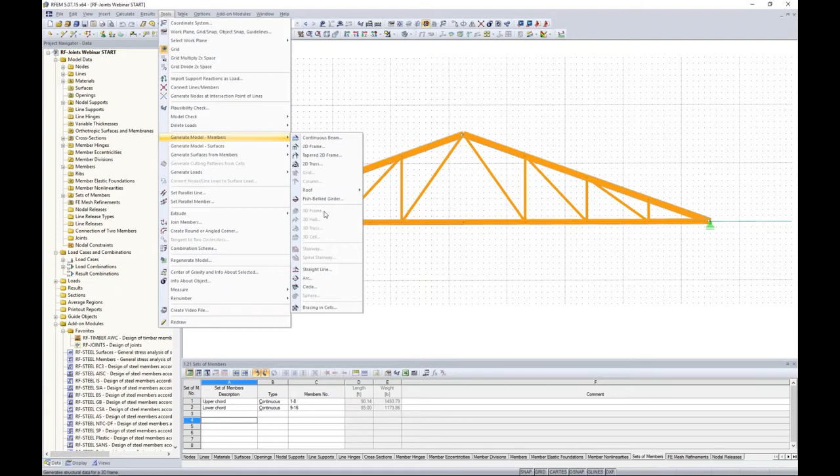So for the sake of time, I did go ahead and create this general truss here, and I am in a 2D environment. So in order to create this truss, I used our structure generator. If we go up to Tools, Generate Model, under Members, you'll notice that we have several options here. A few of them are grayed out, and that's simply because I'm in a 2D environment. But for this example today, I used the 2D truss option. This dialog pops up. You can see all of the different truss types that we have. We have the option to set our diagonals, different directions, and the rest is pretty self-explanatory.

We simply give it the number of bays, the total length. It's a pretty large truss for today, so we set this at 85 feet and the total height at 15 feet. Then the program asks us to set the cross sections. So for the upper chord and lower chord, I just gave it general glulam timber members, as well as those specific properties for a glulam. I can press my little info button here to see the cross-sectional properties, a 6x12 for my upper chord, and for my lower chord, I modeled a 6x10.

For the diagonals and verticals, these are just more of post members, 5 inch by 5 inch, Douglas fir larch, so a softwood here. Again, the member properties can be viewed. Now, the program automatically sets the member type to beam for the upper and lower chords, and you'll notice that the diagonals are set to truss.

For any type of modeling software finite element, we typically have different member types. For our program, beam type is anything that would be a beam or column. Now a truss would be the same thing as a beam, but we've automatically applied the moment end releases to those members. So a truss makes perfect sense for all of our internal members within this truss that we don't want to transfer any moment to our upper and lower chords.

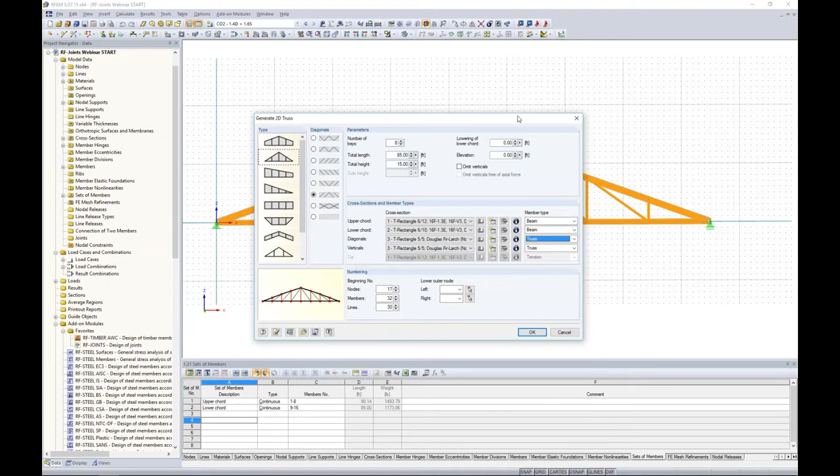So leaving these settings as is for the member type, we press OK, then we'll get the generation of our timber structure here. Then I did add a pin support on my left-hand side and a simple roller support on my right-hand side. Now, the other thing that we need to take care of is that when I did generate the truss, a fully rigid connection was available at the top of the truss, also on the left and the right.

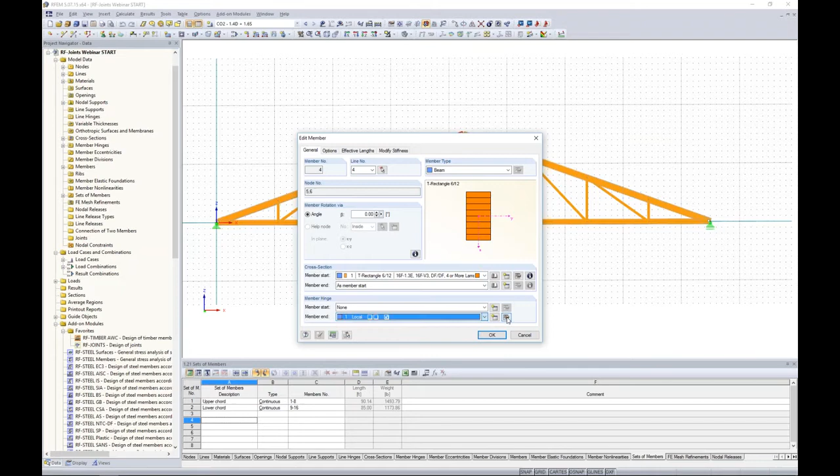So you'll notice that I've applied a simple pinned member end release for the top of my truss, just one of the members. You can do so by editing the member, double-clicking it. You'll notice that we have member hinge at the start and member hinge at the end. I just created a moment release, which you can see here in the two-dimensional direction about the local y-axis. Now I did so at the beginning of the member on my left-hand side and the end of my member on my right-hand side. So modeling is essentially complete for this simple timber truss.

I did also apply some loads, and I have two load cases. You'll notice in my drop-down box I have dead load and snow load. So my dead load, if I display it, is just a simple member load, 0.08 kips per foot. The snow load, on the other hand, is 0.12 kips per foot in the projected Z direction. So we're taking into account this member angle and how that load directly applies to these upper chords.

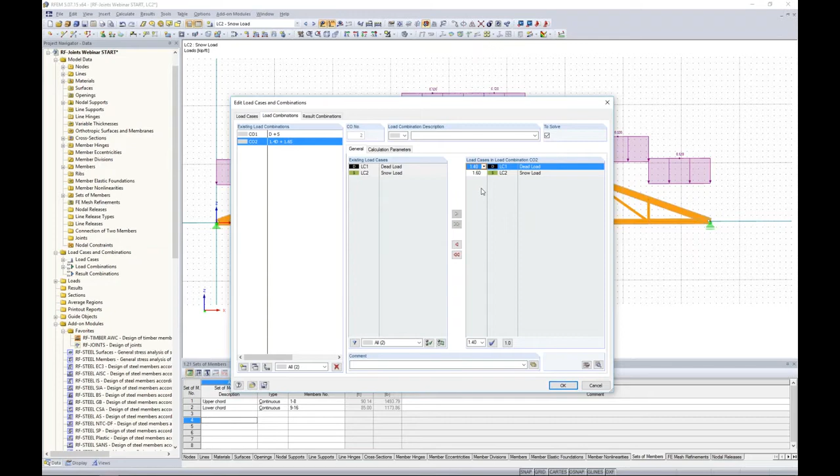Now I also created a couple of load combinations just manually, and if we enter the load combinations dialog box we can see this. So we do have the options to automatically create these load combinations like I mentioned per ASCE 7 for example. But for the simplicity of today's example, I created two load combinations. The first could be considered an ASD load combination where my load factors are 1.0 for dead load and snow load. My second load combination is maybe an LRFD load combination where I have applied the load factors of 1.4 and 1.6. You can see in this drop-down box we have quick access to them, or we can overwrite them with whatever load factor we would like.

So now you have the ability to toggle between the load cases and load combinations, and we can run our first analysis. I can go to calculate all, and we'll see within a split second the model will be solved. So we are still in RFEM. We haven't touched any of the add-on modules yet. So once we run this analysis, in our project navigator over here, we have the results tab available. And we can, for example, view everything graphically such as global deformations. We can change the display factors here.

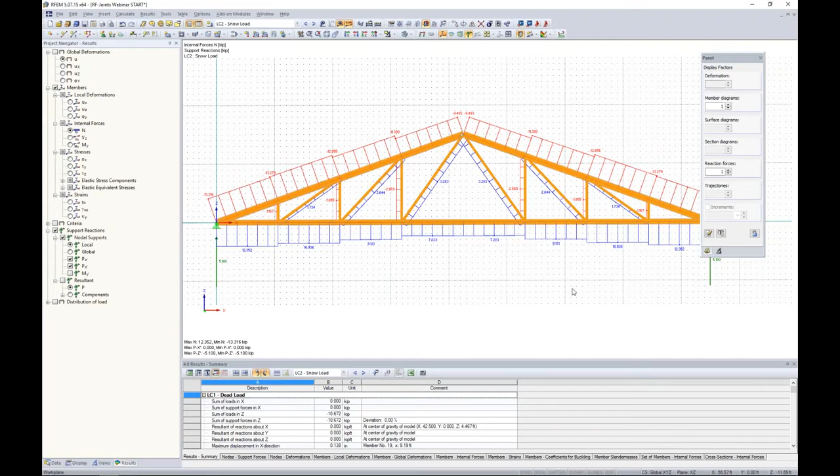What may be a little bit more interesting is to take a look at our member internal forces. Here you can see we have our axial forces. We have some pretty high tension forces on the bottom. We have high compression forces at the top, denoted by the negative magnitude sign here. Taking a look at shear forces, I can always increase my member diagrams here. And lastly, we have our moments. We should have no moment transfer where I put in those moment hinges as well as along our diagonals and verticals here. Same thing for support reactions.

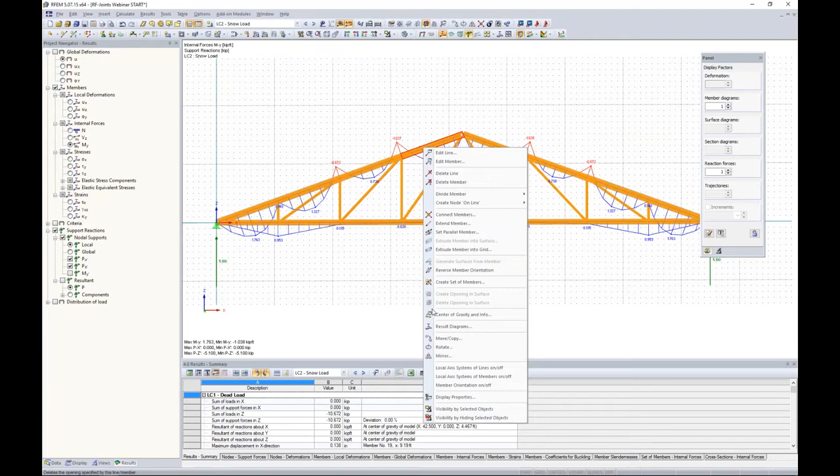These are controlled here graphically within our results in the project navigator dialog box. And you have full control over colors, sizes of fonts just by going to Options, Display Properties. Now, this is great graphically, but sometimes we want to see a little bit more information as it relates to the member. So we can always right-click on a specific member and choose Results Diagram.

Now you'll see the entire member here. We can turn on more graphs such as internal forces, deflections, and get a more realistic view of what's going on along the length of the member. You can print this off directly to our printout report. You can export directly to Excel for further sorting. So a lot of powerful capabilities in just viewing our analysis only.

So now that we have run a full analysis, that's great, but typically as design engineers, we want to move on to code checks. So this is where we are going to make the clear distinction that we're going to utilize an add-on module. In the data navigator over here, you will see the long list of add-on modules. We do work in the add-on module system because we really want to cater the software to your needs. Not everybody is going to be in the Chinese steel design, for example, so why should you pay for it? So we, again, are trying to cater towards your specific design needs.

We also have them organized a little bit better with this add-on modules drop down at the top here according to the different materials and applications, dynamic analysis, things like that. So for today, we will launch the RF-TIMBER AWC. Now, to begin with, you'll notice we have both ASD and LRFD, so that's nice. Some other software programs for timber design only give you ASD, for example, so you have complete control over which design method you would like to run. Today, we will choose the LRFD.

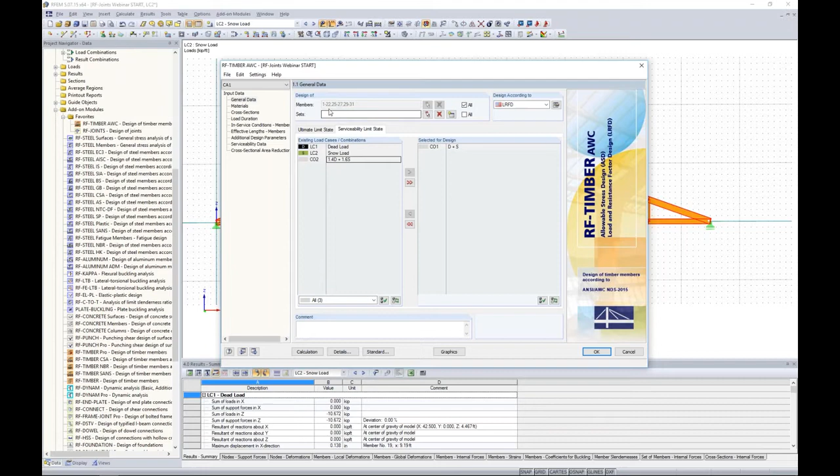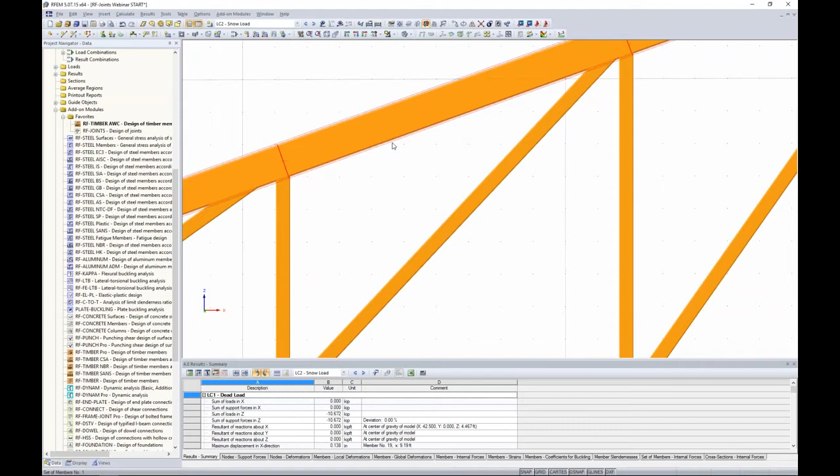Now, the next thing to go ahead and define are which members or sets of members would we like to design. So let me quickly explain that when we go back to this add-on module, if I zoom in here, the program automatically created a set of members with the truss generation for my bottom chord, and I also have a set of members for my upper chord. What I wanted to mention is if you do zoom in, you can see a faint dotted line around it. I know that's hard for you guys to see, but if you were in the software, you'd be able to hover over that and see it's a set of members.

A set of members will essentially be designed like a continuous beam. You know, we don't want to optimize one of these individual members different from its adjacent members. We want to get a code check for this entire bottom chord. So that's where the sets of members comes into play. Now the default is to select all members.

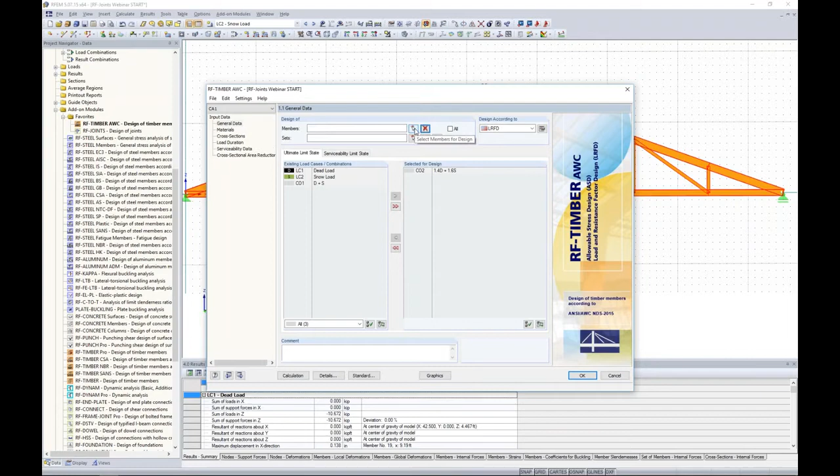I'm going to clear this, and for my member design, I'll scroll in here and I can just use my selection box, similar to what you would find in AutoCAD, for example, to select all of my internal diagonals and verticals for my member design. And for my sets of members, I simply choose graphically the upper chord and the lower chord, and we click OK. So now we have the distinction between members and sets of members for what we'll be doing for design purposes. Now all I need to do is to simply move down the list.

Next we will go to materials. Again, everything is brought in from RFEM, so I don't have to redefine my materials, my geometry, my cross sections. All that we're doing in this add-on module is giving some further design information related directly to the NDS code.

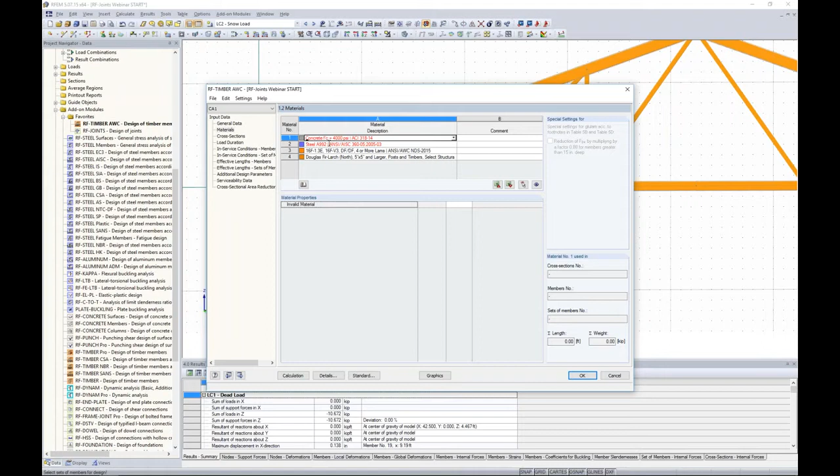Now you'll notice that we have two bright red materials here, and that's just because when I open up a new model, concrete and steel are defaults within the program. I can delete these back in RFEM if I wanted to, but all the program is telling me is that these are not applicable in the timber add-on module. That makes sense. But our two materials that we did define to our members back in RFEM are applicable. I can click them and view all of the material properties that will go into the design of this member.

Again, cross-sections, same concept. The member cross-sections are brought in from RFEM. I can view some of the cross-sectional properties here again if I'm interested in them. And we can move on to load duration.

Now, this is load duration factors. We assign dead load and snow load to the applicable loads that I applied in RFEM. The program is smart enough to know what load duration factors to apply to this. Now, we can always use our drop-down box to adjust these, but even more so, there is the standards button down at the bottom of the dialog box.

So the standards button will show you every single factor that is going into the design process within this add-on module. So for example, the load duration factors. What is nice is that you can adjust these if for some reason you don't fall between 10 years and 2 months, but somewhere in between, you can adjust them. That's completely up to you.

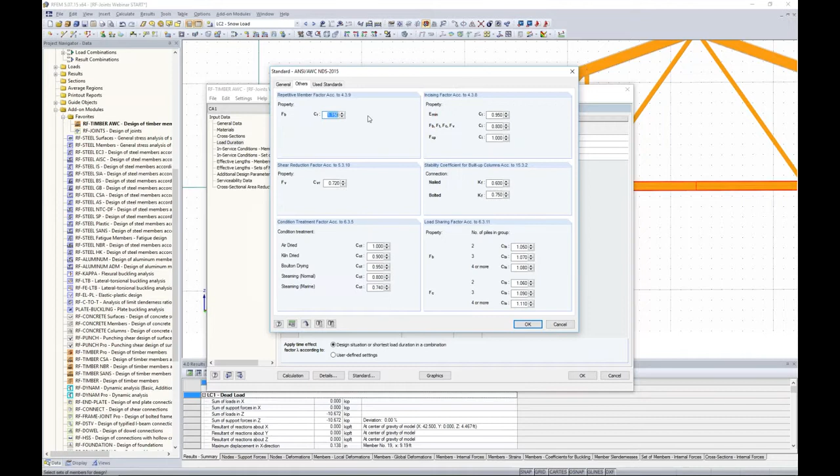Then you'll notice some of the other factors such as temperature factor, wet service factor. If we go to the others tab, repetitive member, shear reduction factors. Again, this is just all the information from the code. Under the used standards, we just list for you to know which standards are being utilized for the design, which you'll see at the end, we give you references to these standards as well.

So moving on down the list to in-service conditions. Again, this just comes from our standards button down here, moisture service conditions. Are the members dry or are they wet? Our temperature ranges, we can change these if we would like. Now you'll notice that we have 2 separate tables for members versus sets of members. This is just so we don't group everything together. I think it's laid out a little bit nicer when we separate members versus sets of members, and then we can control those factors individually.

Effective lengths for members. So this is stability checks. You'll notice that we have buckling about the weak axis, buckling about the strong axis, and lateral torsional buckling. So I'm going to assume for all of my internal diagonals and verticals here that buckling about the strong and weak axis as well as lateral torsional buckling is a concern. So I'm just going to leave everything as is here, and I'm going to let the program determine if this is okay based on my design.

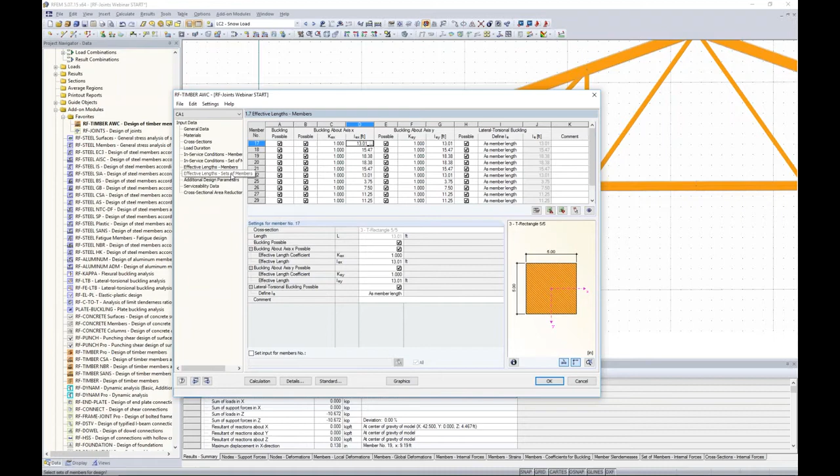Now the effective lengths here default to the full member length, but you can easily control these lengths by typing it in or graphically using the measuring tool here, so you have complete control over this. Now again, our sets of members is on a separate table. And for my upper and lower chord, I'm going to assume that I have complete lateral bracing along the length of the member. So therefore, weak axis buckling about the local x-axis, which I have my axes shown down here, is not a concern to me.

And it would be the same thing for my lateral torsional buckling. So this is not a concern based on my connections or my lateral bracing. All I have to do is just simply uncheck the possible. Buckling about the y-axis or the strong axis, I am still concerned with this, but right now it is set to the full member length, the full set of member length. So it's pretty large, 90 feet and 85 feet.

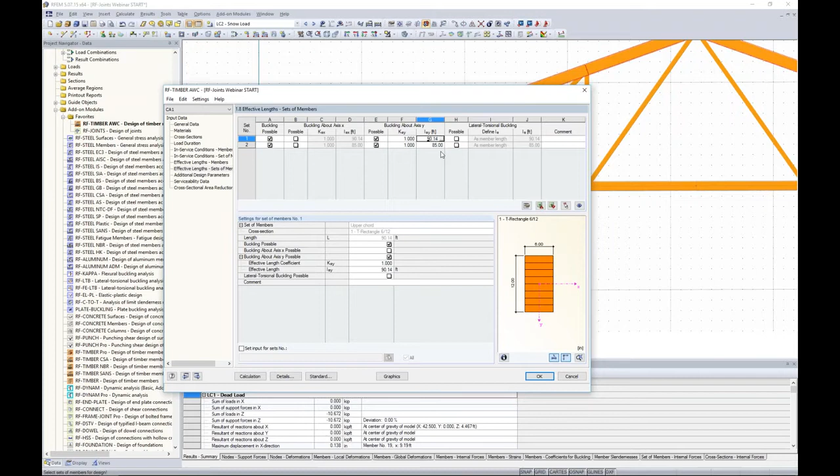Maybe for uplift wind purposes, I have much smaller unbraced lengths here. For example, the upper might be 3 feet and then the lower might be 3.5 feet. So as a design engineer, you always want to pay careful attention to your unbraced lengths because this significantly affects our stability design.

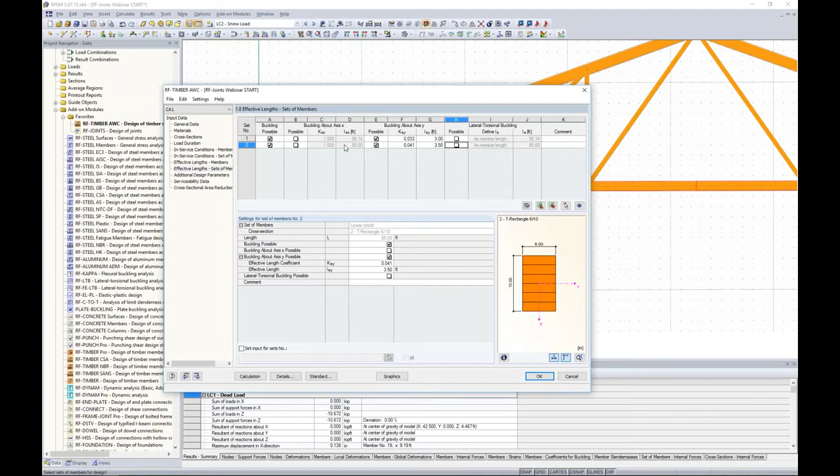Okay, so moving on to additional design parameters here. This is just shear reduction factors, edge bonded. This refers to our glulam members for our upper and lower chord members. We have the code references here. Again, the standards button will tell you what those factors are. If we scroll down a little bit further, here's our incising factors and repetitive factors for our post or our brace members within the truss.

And we can move on down to the serviceability data. Here is just deflection checks. We can check every single member if we'd like to in our model, or maybe we're only concerned with checking a couple of members. So for this example, I will graphically choose perhaps one of my diagonals here that I want to check my deflections.

I click OK. The manual reference length is set to the full length of the member. That's fine. Do I have a pre-camber? If so, I could put this in here. And lastly, I need to specify if this is a beam or cantilever. Now I can do the same thing with a set of members.

So maybe I'm interested in my bottom chord deflection. Well, all I need to do is to graphically select my bottom chord here. The full reference length is set at 85 feet. And again, we just use the beam type beam. Now the question is, what deflection ratios am I comparing this to? Where can I control that?

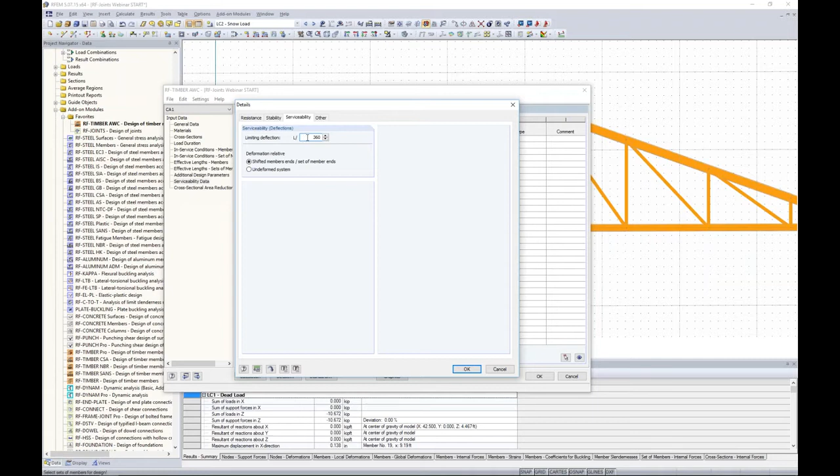Well, under the Details tab under Serviceability, here's my limiting deflection ratio. You can see the default is set at L/360. Now for cantilevers, it will always use 1/2 of this ratio that you set in here.

Then you need to specify whether the deformation is relative to the shifted member ends or the undeformed system. This may be better known as relative versus absolute deformation. So this is where we can control this limiting deflection ratio and change that if we'd like to.

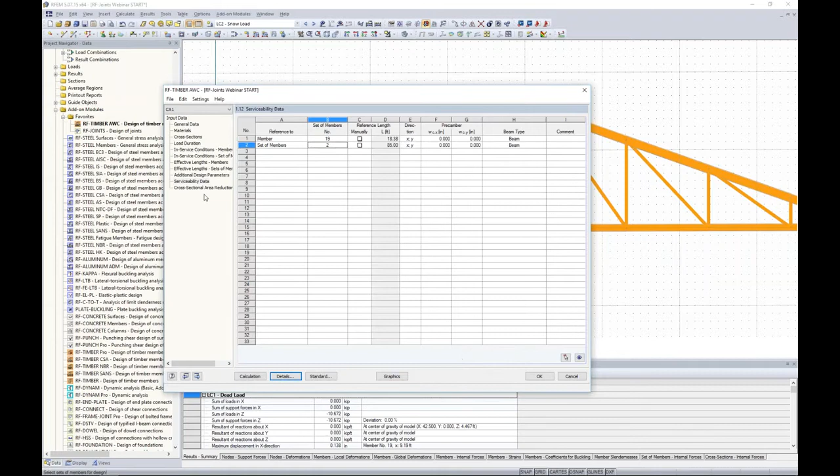And lastly, we can move on to the cross-sectional area reduction. This is if we have a notch within our member. Maybe the member connection at the ends, or maybe the member is sitting on top of a wall or another member, and we have to take this cross-sectional notch out of the member. We can easily account for this by just selecting the member graphically again, and then giving where the notch location is, whether that's the start, the end, or within the inner span here. Then we just give the notch the geometry, and the program will automatically account for that cross-sectional area reduction.

So it's smart enough to only compare those internal forces at this notch location for design purposes, meaning we don't have to reduce the entire cross-section of our member and get an over-conservative design. So just a nice little additional feature if you do have this scenario. For our case, we won't do that today.

Now, before running the calculation, I want to quickly run through the rest of the details tabs. What is exactly going on behind the scenes here with some of these other options? So the first one under resistance is consideration of connections, the reduction of limit tension stresses. So if I check this, what this means is that occasionally we have the weakening of a cross-section at a connection. So what I can do is check this checkbox, and all I need to do is to select a node, and here I give the connection length.

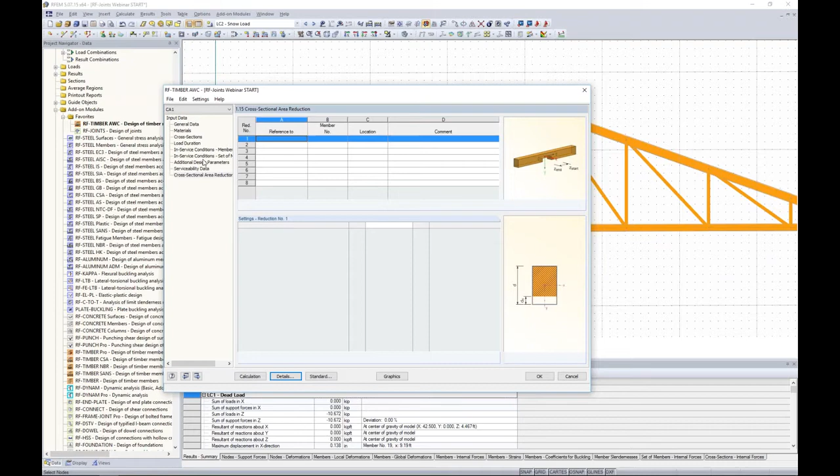Under the Stability tab, we have Perform Stability Analysis automatically checked. If I were to turn this off, click OK, you'll notice the effective lengths where I put in for strong and weak axis buckling, those are gone now. So I'm telling the program I have no concern with buckling or lateral torsional buckling, so completely ignore this for my design. Now, again, the default is to have this turned on. We've already been through this with our particular tables.

What we're doing is a stability analysis according to the equivalent member method. With the equivalent member method, the NDS says to take into account secondary effects within the design phase for our structure. This is very different than something like steel, for example. Steel tells us to take into account secondary effects in the analysis section.

Things like P-delta, stiffness reductions, notional loads are all taken into account in RFEM, the analysis side. But again, timber is a little bit different in that we have these factors added to our bending capacities, for example.

So with that said, back in RFEM, if I open up my load combinations, you'll notice that under calculation parameters, it is always default in the program to run a second order analysis for our load combinations. This will take into account P big delta and P little delta.

So perhaps you have an existing structure, or you're just really close on your design checks and you don't want to increase your member sizes. Technically, you can go back into RFEM, change this to a geometrically linear analysis, and then you can take into account these second order effects within the add-on module only, so the design part of it.

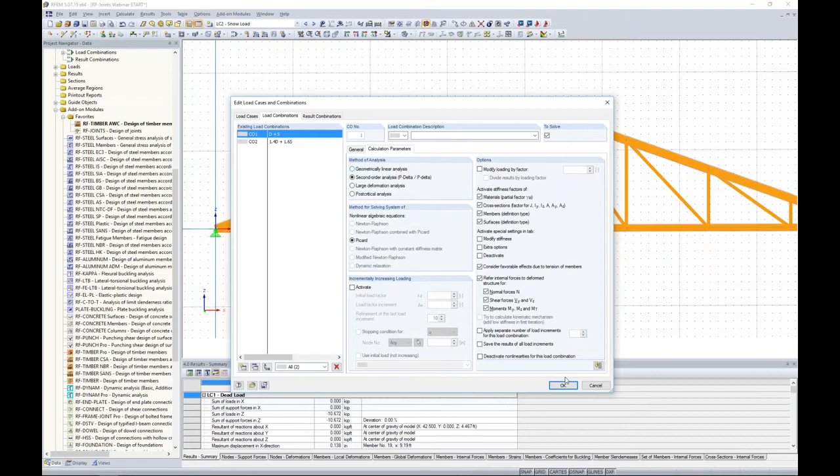Now, it is typical for most engineers just to leave on P-delta analysis in RFEM. Therefore, your internal forces are a little bit higher, but it's just a more conservative route to take.

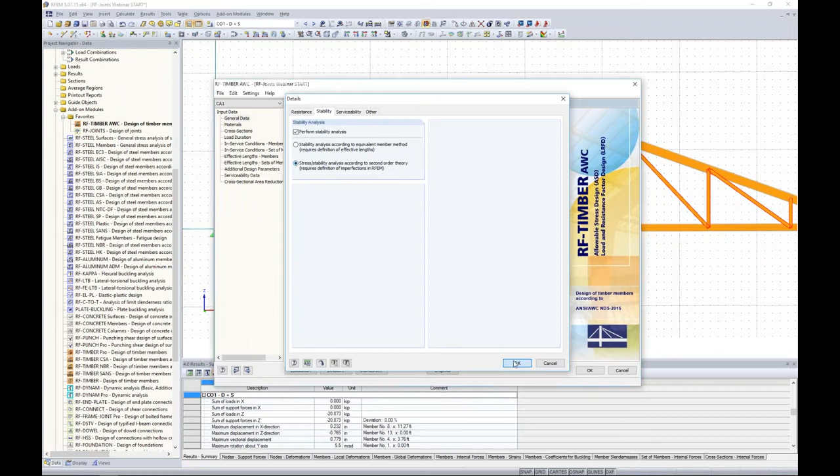Now, the other option within here is stress stability analysis according to second order theory. It requires definition of imperfections in RFEM. If I were to check this, what I'm doing is I'm telling the program under the effective lengths that the buckling for strong and weak axis, I'll take that into account with the analysis.

Maybe that's with stiffness reductions or with those notional loads, imperfections, things like that. With lateral torsional buckling, there is no way to take that into account with the analysis side, so I'd like to still do a check with that within the design side. Regardless, today we will stick with the default of checking our strong and weak axis buckling.

Serviceability we've already been through, and on the other tab, cross-section optimization. So design ratios are maybe more around 0.8, possibly 0.9 - it's typically not 1.0. So for optimization for your members, which I'll show you in just a second, you can change this to 0.8, for example, for design purposes.

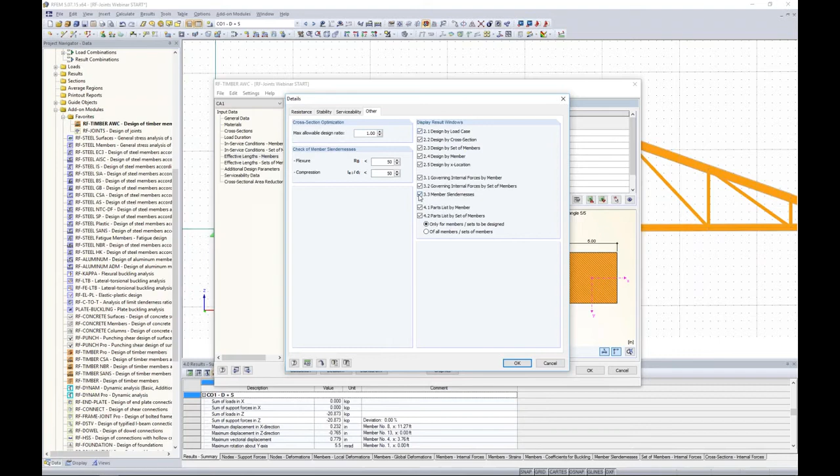Check of member slenderness. If member slenderness is a concern, here are the ratios that we have set according to the code for flexure members, compression members. You will need to activate 3.3 member slenderness right here for our result windows if you are wanting to check for member slenderness. So that's pretty much the concept for all of the input data.

Now we're ready to run our first calculation. You can see that it solves within a quick second. All it's doing is bringing the internal forces into this add-on module from RFEM, and we apply the NDS code for our design. Now we have our results tables available, and we can view the design by load case.

We can view design by cross-section. We have 3 different cross-sections here. Maybe we want to view design by the sets of members or by each individual member.

Now, what's also great is that as I'm clicking through these tables, you'll notice that it is synced to the graphics view in RFEM. Even the X location of my controlling internal forces line up with my tables here.

And something else that I really pride ourselves on, because I know this isn't available in a lot of other software, is that we give you the code check for everything within the NDS. So we're not just giving you the controlling code check for each member, but you can actually scroll through and view the different checks individually.

Even more so, we give you all of the variables that go into that code check, as well as the equation references. So if you have the NDS code right in front of you, here's the equation for your C sub P factor. You can quickly flip to it and understand where those numbers are coming from. So again, a very powerful feature.

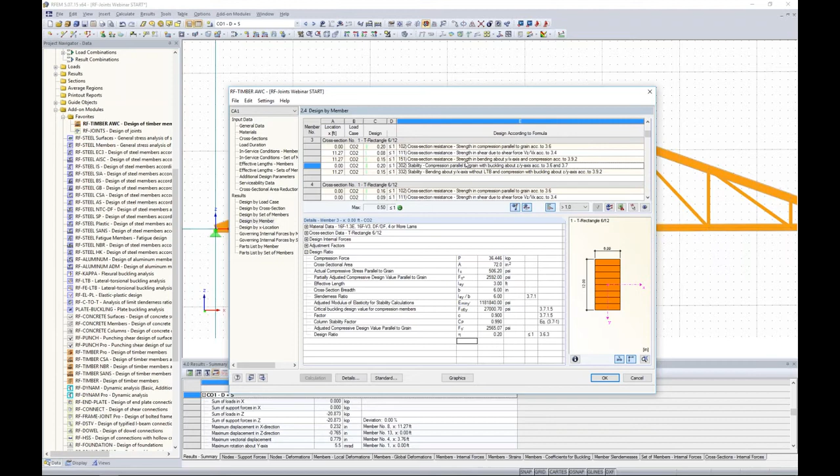Now you can always export directly to Excel to do some further sorting, and as you can see, we have this nice big green smiley face because our design check is only at 0.5. So looks like we're doing quite well with our design. We can also view some of the governing internal forces by member if you are interested in that.

And lastly, we have a parts list by member, or a material takeoff.

As far as optimization, let's go back to our cross sections table, where you'll notice the max design ratio for each cross-section is given. You can see our top chord is pretty low, at 0.22, so maybe this isn't an ideal cross-section to have, and we'd rather optimize to something more like 0.8.

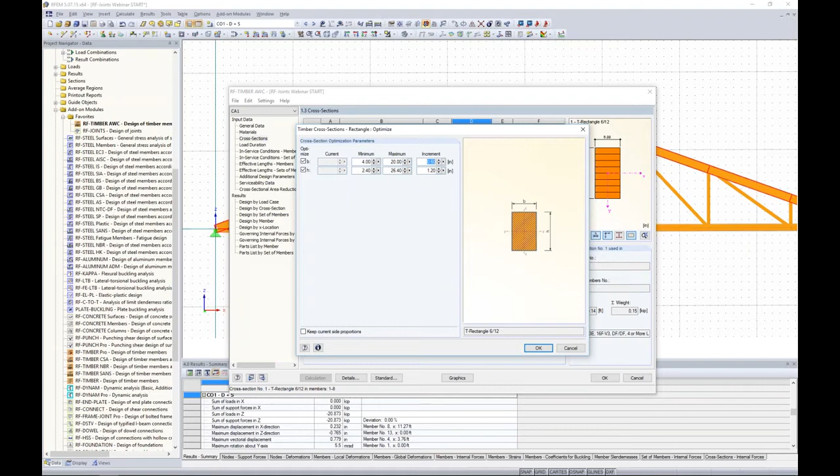We control that 0.8 under our details setting, where we can choose the option to optimize. When I click yes, all I need to do is give the program some dimension ranges for both my width and height, like maybe 4 inches to 20 inches with an increment of 0.5 inches. Then we rerun the calculation, the program will optimize, and we can continue on using these new section sizes.

For connection purposes, I'm not going to do this, so we'll just stick with the design we're given.

Lastly, we can view everything graphically. We're back in RFEM, but still technically in the add-on module, as you can see from the drop-down box and this dialog box here - we're still in RF-TIMBER AWC. I can view my ultimate limit state designs graphically here, and turn on my panel, well below 1.0, and we can print these off.

Serviceability we can take a look at as well. Remember, we only check serviceability deflections for our set of members down at the bottom, and one single member here. So graphically, we can view everything rather than just the tables.

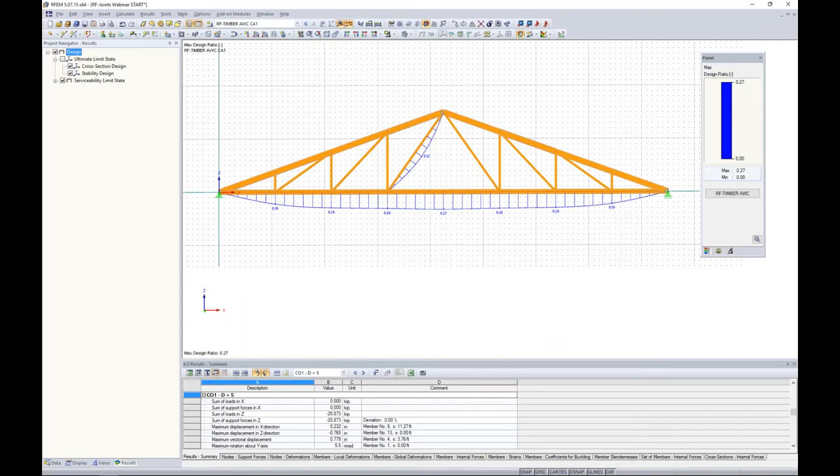So that basically sums up the member design. The next thing we want to move on to is connection design.

I can go back to my data tab, and I have my other add-on module here, RF joints, and I will launch that. Again, just another simple dialog box, which is the add-on module, taking in all the internal forces. We just need to further specify some information.

You'll notice we have steel and timber. Unfortunately, at the moment, steel is only per Eurocode design, but at some point in the future we do plan to add AISC as well as CSA steel connections. But what's exciting is that we did add the NDS 2015 for our timber connections.

You can see we have both ASD and LRFD available. Maybe to just continue on from our member design, we'll stick with LRFD design. We have steel to timber connections.

Now the joint categories - we either have general dowels we can choose from, or you can also see we have bolts. For today, we'll be going with general dowels.

Now, 3 different joint types. We have the first joint type, which is main member only. Maybe you have the cantilever of a beam from a wall, for example - that would be applicable for this type of connection.

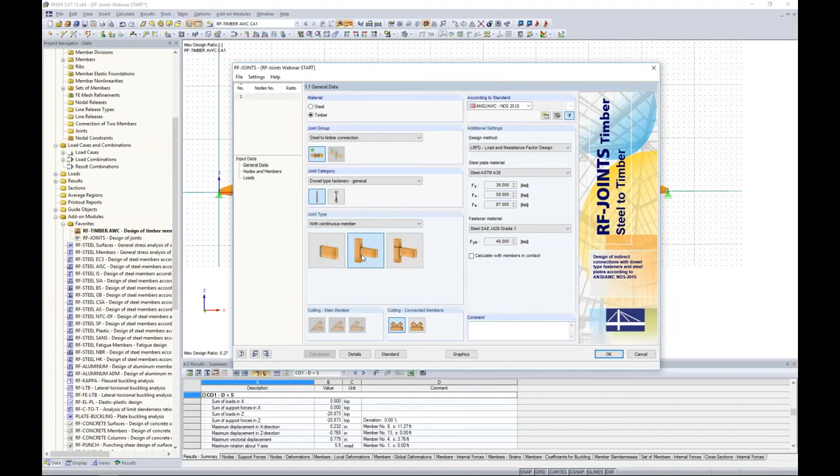The second connection type would be with a continuous member and a second member framing in. That might be something more like this connection here, where we have our continuous upper chord and a vertical framing into that continuous member.

And lastly, we have without continuous member. So at this particular connection joint, we don't have any continuous members that we're wanting to define. This is what we'll be continuing on with today.

As far as the cutting of the main member and connected members, I'm going to pause on this and we'll get back to it, because it'll make more sense once we're visually looking at our connection.

Steel plate material - from this drop-down box you can see we have several ASTM materials to choose from, but if by chance you don't see what you'd like, you can always enter your own user-defined steel materials with yield strength, ultimate, and dowel bearing strengths here. For today, we'll stick with the A36 material.

The fastener material, again, some ASTM standards or user-defined. We will stick with J429 with a yield of 48 KSI.

The checkbox 'calculate with members in contact' - if we turn this on, it essentially tells us that we're considering two members are in contact. If we have extremely high pressures from one member onto the other, the program will flag us and tell us this is something you may want to look into further.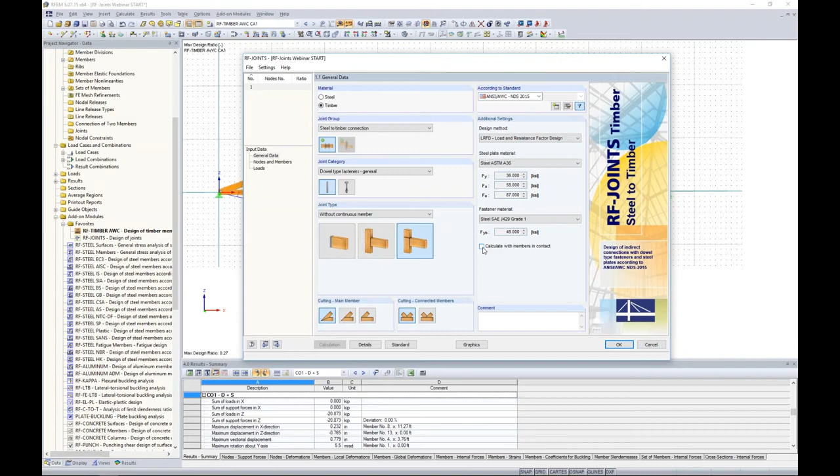So we don't give you design for these members in contact, but it's just an additional check to notify you if we do have some extremely high pressures from one member to another. So again, we just simply work down our list here.

We'll move on to nodes and members. Now in our graphics view, you will see our truss, brought in from RFEM, and nothing's highlighted right now. Everything's grayed out because we haven't selected any nodes in particular. Now this is import from the structural model, or we can set manually here. If we choose set manually, this allows us to define any type of connection that we want, including the materials, the cross sections. We can define different angles, so we don't have to use what we had modeled here in RFEM.

For today, it makes more sense to import what we've already modeled in RFEM, so we can do a further connection design here. The first thing I want to do is choose my nodes that I'd like to consider for my first connection. I'm going to choose node number 1 on my left and node number 2 on my right. These will be identical connection designs, so we'll use those.

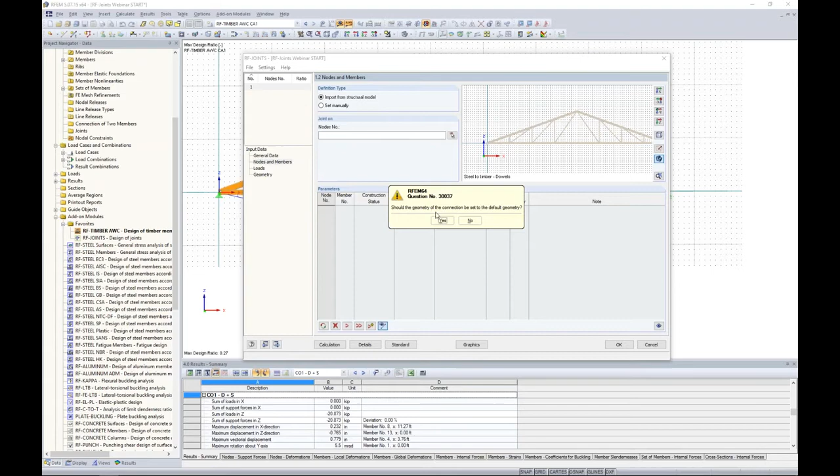Should the geometry of the connections be set to the default geometry? Yes, I want to bring in what RFEM already has modeled. Now you can see I can zoom in here and my members are highlighted at that particular connection. At node number 1, the program automatically assigned the connected member to member number 1. If I use my drop-down, I have connected member, main member, inactive. Member number 9 at the bottom is set to the main member. My materials and cross-sections were automatically brought in from RFEM. Even my angles were automatically determined, so I don't have to worry about redefining that information.

Quickly jumping to geometry, our picture of our connection will be populated here, and I think we're all in agreement that this is not the ideal connection. Nobody would cut these two members right down the middle and create a connection by any means looking like this. So how do we change this?

Well, back on the General Data tab, this is where the cutting of the main member and connected members are affected. So I'm going to change this to the second option, which you can see here graphically.

Now jumping back to my geometry tab, this is looking a little bit better. But ideally, all of these internal forces from our upper chord are going to be bearing down on our bottom chord. Timber is not very strong when we're considering these internal forces bearing down here. So I want to flip-flop these, so to speak.

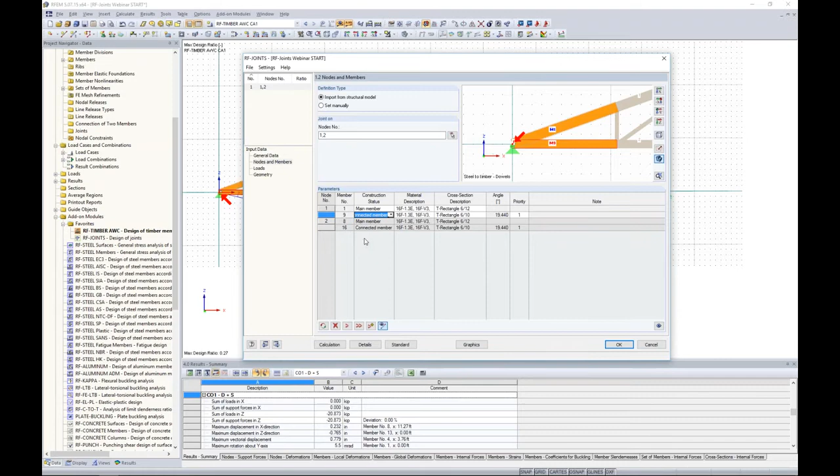So jumping back to the geometry tab, this looks much better. We have those internal forces directed to the support, which is exactly what we want, and then our lower chord is simply framing into that upper chord.

So now that we have defined our geometry under nodes and members, we can move on to loads. What is the load combination that we'd like to use for design? Well, since we're doing LRFD design, I'll choose my LRFD load combination. Load duration and service conditions, this should look pretty familiar to what we just saw in our AWC module, our member design module. Things like load duration factors, moisture conditions, moisture service conditions, temperature.

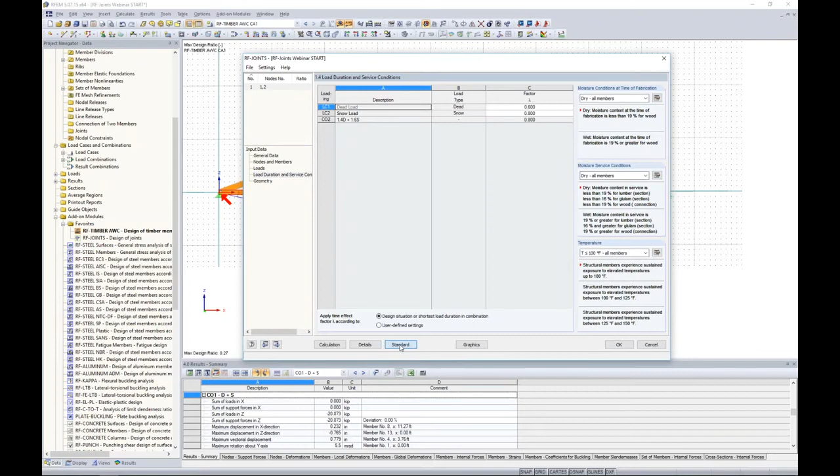Again, if we pop open this standard, here is where we can see all of the different factors that are applied for the connection design. We can scroll through these. Everything's just coming directly from the NDS code.

So lastly, moving on to geometry. This is probably the most important because here is where we are going to define our dowel layout and our steel plate layout. It's pretty self-explanatory. All I need to do is work from top to bottom, filling out each variable here. Now, the shape of the steel plate, the first option is user-defined, which you can see is basic, just rectangular sections at my upper chord and my lower chord.

The second option is Convex Hull. What the program will do is the best attempt it can to simply connect these two rectangles with a straight line, so maybe this is something a little bit more similar to what we'd see actually fabricated. That's an option if you'd like. And the third option is rectangle. You can see this is not ideal for our connection today, but this could be ideal for another scenario. We'll just stick with this user-defined connection for now.

Now the number of steel plates can vary anywhere between 1 and 5 steel plates. For the first run, we'll stick with 1 steel plate. We do need to give the thickness of the plate. We'll set that to 0.5 inches.

Now the distance from the dowels to the plate edge, E1, we do our best to give you all of these variables graphically as well, so you can understand exactly what information you're entering in here. So for that edge distance, we will set that at 1.2. Now, is the width of the slot the same as the thickness of the plate? If this was not, then I could specify the slot thickness different from the thickness of the plate if I'd like.

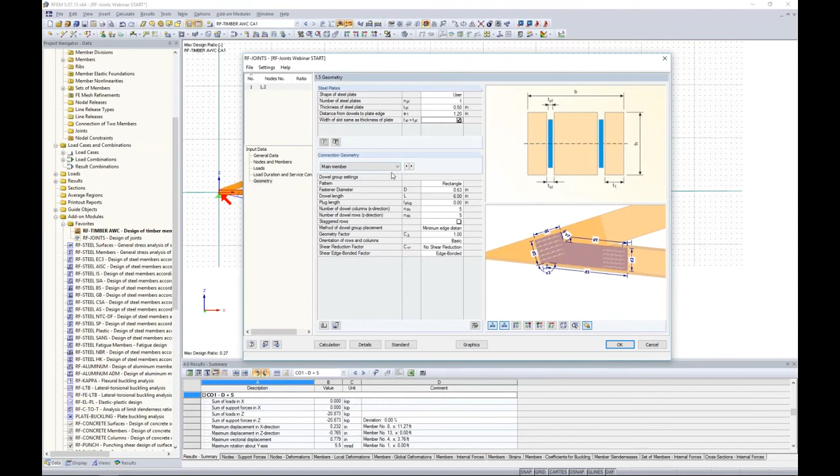Moving on to the connection geometry, you can see that we have the main member, or we have connected members. So we first want to start with our main member. The pattern will always be rectangular. The fastener diameter, which we can change our viewport here and zoom in to see exactly what we're setting in terms of our dowel layout, we will set our fastener diameter to 0.5 inches. Now the dowel length is automatically calculated simply based on the thickness of my member, my glulam member. So this is set at 6 inches for the thickness of the member.

Now perhaps I would like to not see the dowel holes, for example, and I want to put a plug on either side of these. Here's where you can set that plug length of maybe 0.5 inches, and you'll notice that the dowel length automatically takes that into consideration and reduces to 5 inches. For today, we will leave the plug length as 0.

Now, the number of dowel columns, we can set this to 8. The number of dowel rows, we will set this to 4. The little picture automatically updates here. Staggered rows - this is just a more economical design. We still have 8 columns and 4 rows, but because our bolts are staggered, we can get away with a few less dowels or bolts.

The method of dowel group placement, we have 3 options here: the minimum edge distance, the minimum dowel spacing, or user defined. The first two here are just according to the NDS code. For this first run, we'll just stick with the minimum edge distance. Now the geometry factor comes from NDS code table 13.3. We can adjust this if we see that fit.

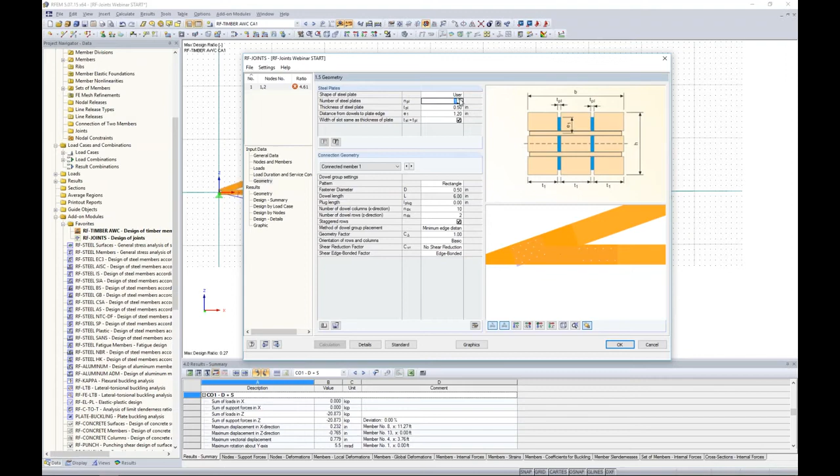Scrolling down to my connected member, I obviously have a huge problem here as well. My load carrying capacity of a single dowel is exceeded. So before checking out the rest of the results, let's go back to our geometry and make some changes here. Maybe the first change I'd like to make is I'm going to add an extra steel plate. It's asking me, do I want to delete my results?

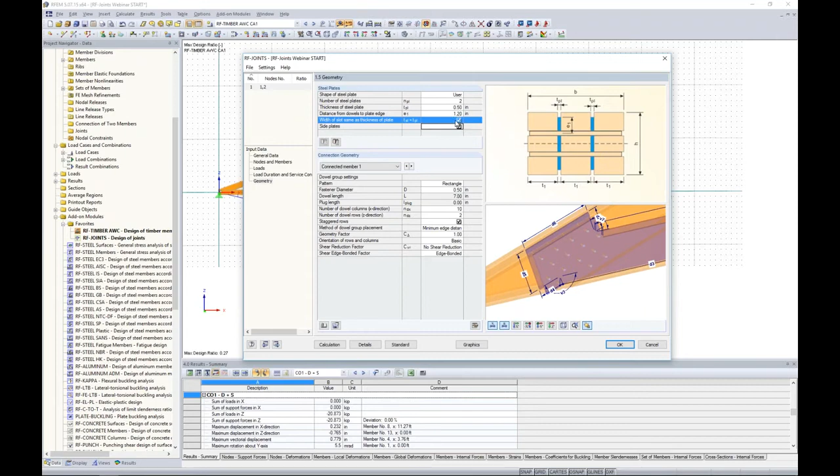Yes, this is fine. Now I can rotate this view around, and you can see that these steel plates are shown here graphically quite nice. It's a nice rendered view where we can actually see what's going on. Now, there are a few other settings that came up with adding 2 steel plates. For example, we can set these as side plates if we wanted. So rather than be embedded within the glulam members, you can see now they are side plates.

For us, we will uncheck this option, and the third option is the uniform placement of plates over the width, which you can see from this cross section here. If I uncheck this, then I can set my distance between the plates, T2 here in the center. Maybe I want something more like 2 inches. So you have control over that. It doesn't necessarily need to be the same width for all 3 dimensions.

Looking at our connected member number 1, I'm going to leave most of this as is except for the method of dowel group placement. Sorry, I want to switch this over to the main member first of all. So we'll scroll in here to our main member. Now, instead of the minimum edge distance, I'm going to choose a user-defined setting here. So the distance between dowel columns, which you can see everything is shown graphically here for what numbers I'm entering for my variables. Perhaps the distance between the dowel columns, we'll set this at 5 inches.

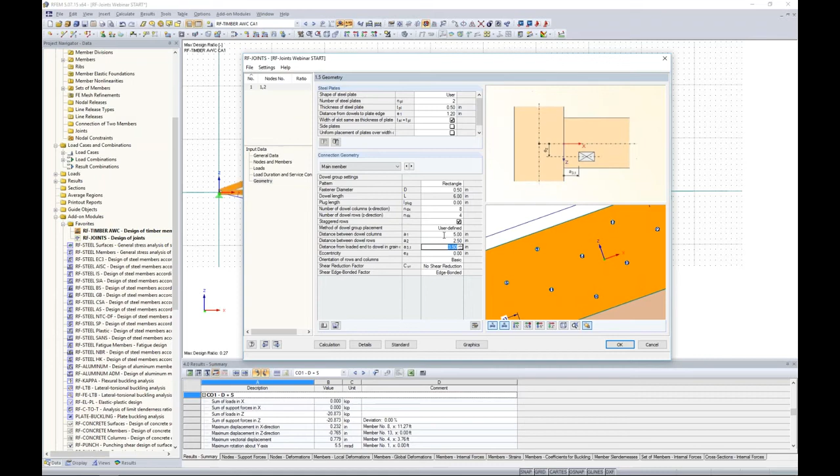The distance between the rows, we can change this to 2.5 inches. And the distance from the loaded end to the dowel, A3, which you can see here, we will set this to 6 inches. Eccentricity, if you want to move this connection up or down, you can do so as well with this eccentricity setting. Now, everything else we'll leave the same for this main member.

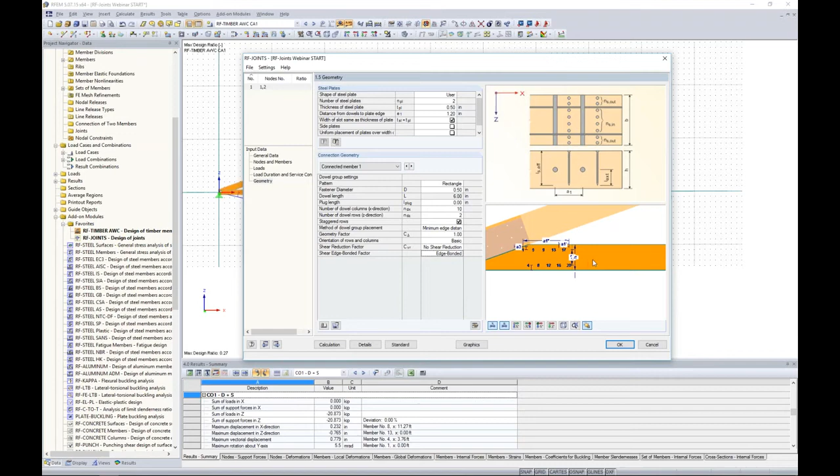Connected member number 1, remember we're extremely overstressed here. There were pretty high tension forces on this lower chord. So maybe I want to space out these dowels a little bit more to get a little bit more capacity down here at the bottom. Now we did add a second steel plate, so that will help us as well. So instead of the minimum edge distance, I'm going to use these user-defined settings as well.

So my distance A1 between my dowel columns, I'll set this now to 5.0. And the distance between rows will be 6.0, and the distance to the edge, A3, will now be 6.0 as well. No eccentricities. So now that I've made these slight adjustments, we can quickly rerun the calculation with this new geometry to take a look at our results. It looks like we're still slightly overstressed, 1.23. Well, at least we're doing a lot better than the 4 point whatever it was code check from before.

So we're almost there. If I scroll down to my connected member, I'm now at 0.8 as my controlling code check here for my load carrying capacity. That's great for design purposes. So I think we're done with that connected member. But we still want to go back and address the main member quickly. Well, maybe I don't want to add any additional dowel rows or columns. I'm content with the size of my dowels.

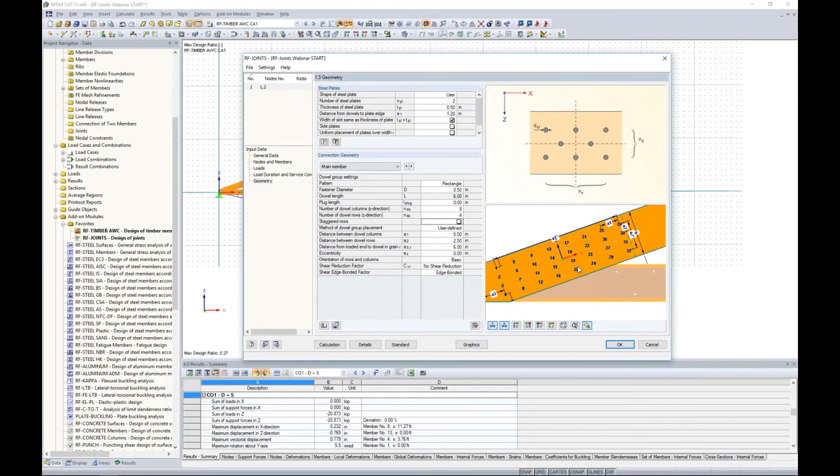So what I can do is just simply uncheck my staggered. Do I want to delete my results? Yes, that's fine. So now instead of staggered rows, you'll see that I have a true 8 columns and 4 rows. And so we have a few additional dowels added to this connection. We'll run the calculation again. And I think that we'll see now our controlling code check is 0.82. So that is good for design purposes.

So now taking a look at some of the other design tables that we have, designed by load case here. We only have one load combination we're solving for, designed by the 2 nodes, node 1 or node 2. Maybe the most user-friendly table would be this design details.

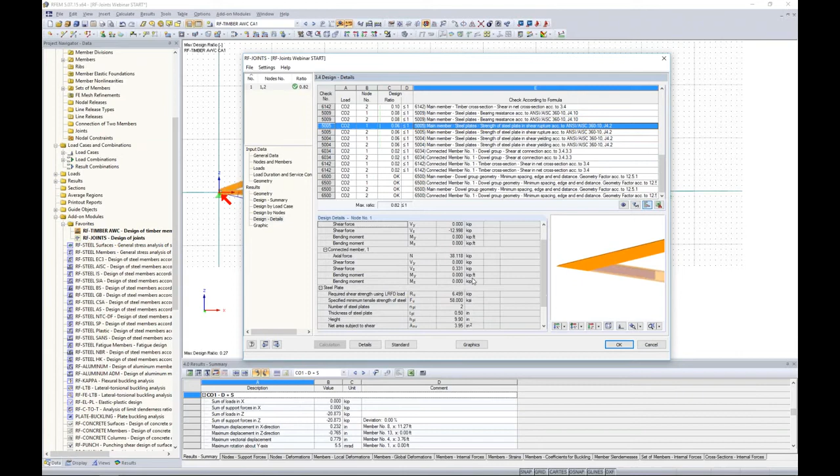Here you can see that the ratio checks are set in descending order from the most controlling to the least controlling, but we also have the checks for minimum edge distances and dowel spacings. And again, everything is as transparent as possible with the code equations and references. Even the internal forces that we're designing for at that particular location are listed.

Our geometry here is just the geometry of the plates. You know, most of this was in user input, but things like the slip modulus for the fasteners, given the slip modulus for the connections, things like that.

Now, our last graphic here is pretty powerful as well. Obviously, we're not a program that's going to give you shop drawings or fabrication drawings for these steel plates, but what we can do is provide you a quick link to create a DXF file for this connection. So you might want to be doing additional drawings in AutoCAD, for example. Well, at the click of a button, you can create that DXF file if you would like to. So again, a pretty powerful feature here for our connection layout.

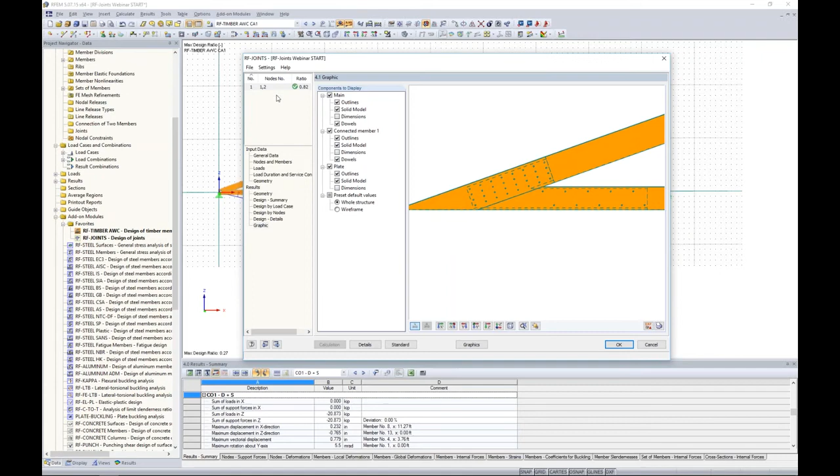So that sums up the first connection design, and real quickly we can go to graphics, and the program will automatically bring that connection back into RFEM for the graphic view. We can even rotate our member around and see the dowels and the steel plates in there. So in terms of actual rendering, everything is shown there.

Going back to the add-on module, I'm going to do a second connection design pretty quick. So we'll just create a new case here. You can rename it if you'd like. And again, just jumping through some of this user input entry that we've already been through, we'll create without a continuous member. We are doing LRFD design, and everything else we can keep as is.

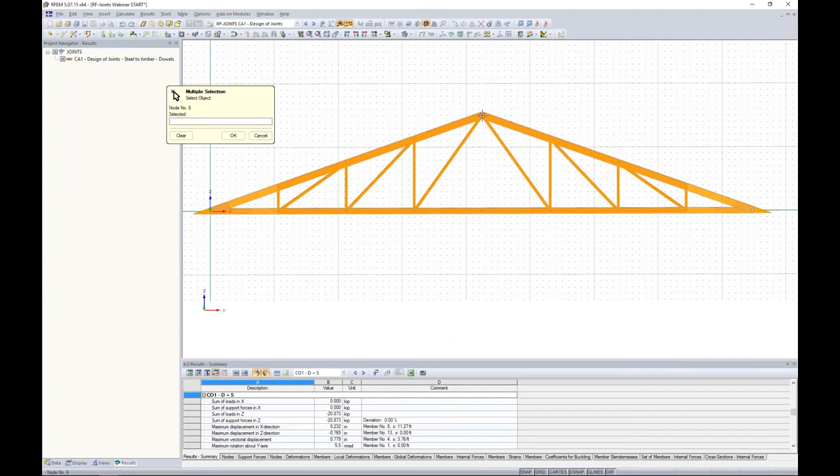The nodes and members for this connection, I'm going to choose the top of my truss. And I click OK. Should the geometry be brought in from RFEM? Yes. Now you can see that we have 4 members for this connection design. The program automatically assigned the connected members and the main member to the individual members that it brought in from RFEM. So how do we think this connection will look with how the program assigned it?

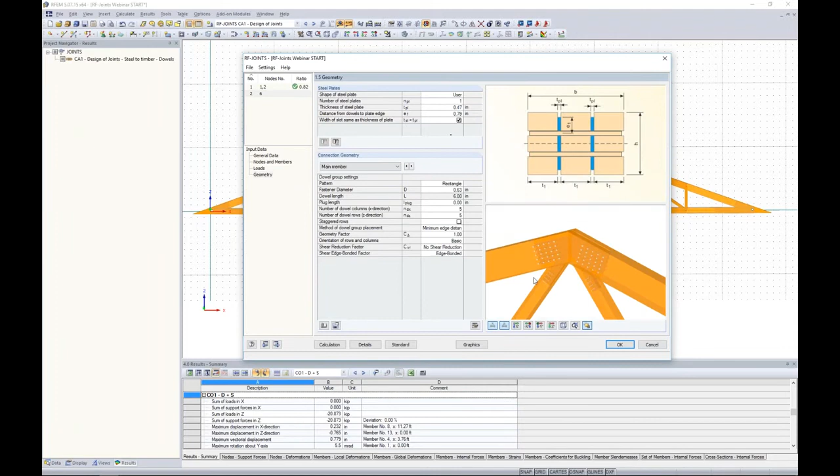For this, we jump back to our geometry tab and we take a look at our connection, and I think we can all agree that this is a pretty big mess. This is certainly not what would ever be created by the contractor, for example. So we can adjust this back under our nodes and members, and the main member right now is set to this brace. Instead, I'm going to set the main member to my upper chord. Now my brace, I'm going to change this to connected member, and the program has automatically rearranged all of this, so we'll jump back to our geometry, and this connection looks much better.

Now, one quick note about this, when you have multiple members, you'll notice that we now have priorities. So it looks like the program automatically assigned the correct priorities for now, but let's say the other upper chord here is assigned to priority number 3. Well, again, jumping back to my geometry tab, we have a mess again.

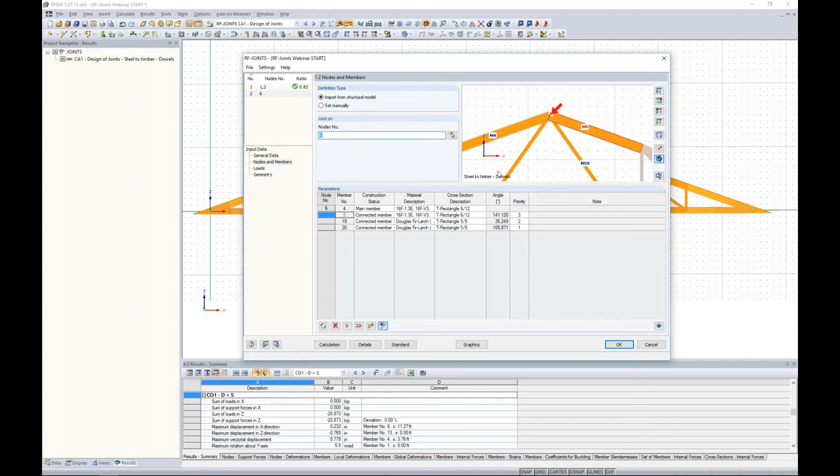So if you're not seeing what you like, you can just make some further adjustments rather than what the program automatically set these members to, whether that's in the nodes and members or under the cutting of the main member and connected members. So eventually you'll get the connection that you would like. It just may require some adjustments here. So for now, we'll change this back to priority 1, and we should be good to go.

As far as loads, we're choosing our LRFD load combination, the load duration and service conditions. We're not changing anything here. We'll leave this all to default. So real quickly, since we've been through most of this, we will just fly through some of the user input for our connection data. I'm going to automatically assume we're going to need 2 steel plates here.

The thickness of the steel plate will be 0.5 inches. The distance from the dowels to the plate edge will be 1.2. This dimension here in the middle, I'm going to again set this to 2 inches.

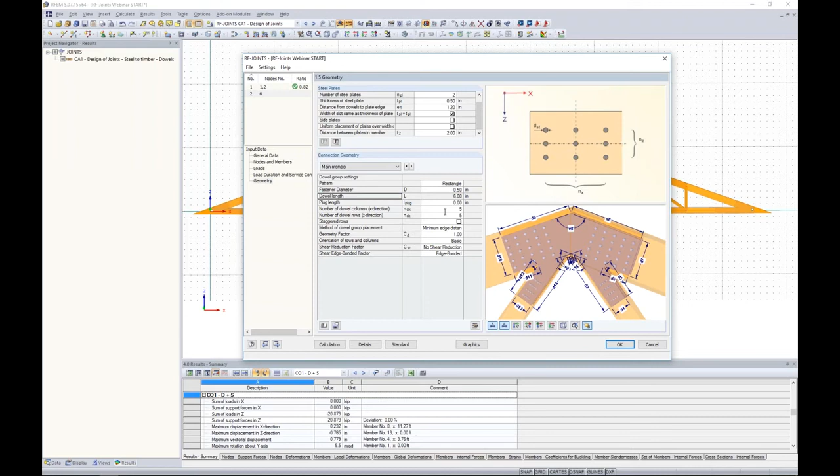So this coincides with my connection at the bottom of the truss too. So my main member here is the first member I'd like to create. The fastener diameter, 0.5 inches. The number of dowel columns, I'm going to set this as 8 columns, and we will set this as 3 rows. I will utilize a staggered effect here, which we can change around our dimensions to view this a little bit better. And I'm just going to go with the minimum edge distance.

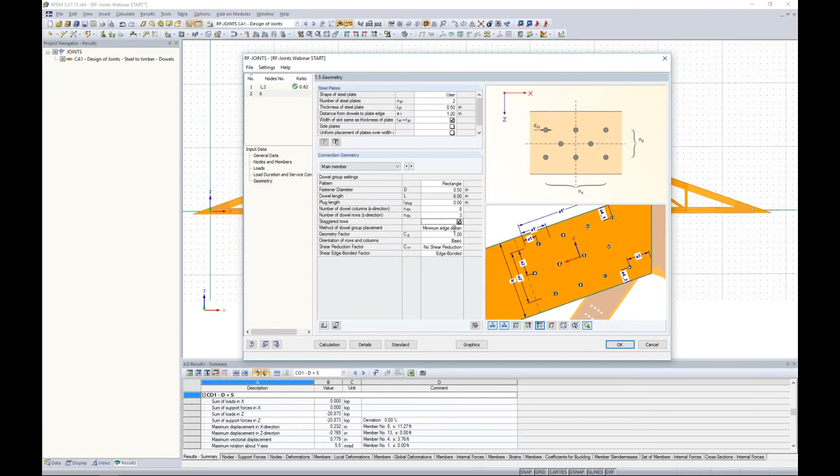So now that I've defined this main member on my left, my upper chord, I probably want to do the same setups for my upper chord on the right. So how do I quickly do this? Well, this is where we allow you to actually save the fastener group to the library. So here is where I can give it a name such as main 1, for example. I click OK. Now I use my drop down to drop to connected member number 1. All I have to do is to open up my fastener library here. I can click on main 1, I click OK, and everything is updated automatically according to what I just saved.

Now what's nice about this is that this fastener library isn't just for this model that we're in right now, but you can save fastener connection layouts between different RFEM models. So a little bit more efficient than manually going in and having to redefine this, especially if you're doing a lot of structures that have similar layouts. So that's a nice feature.

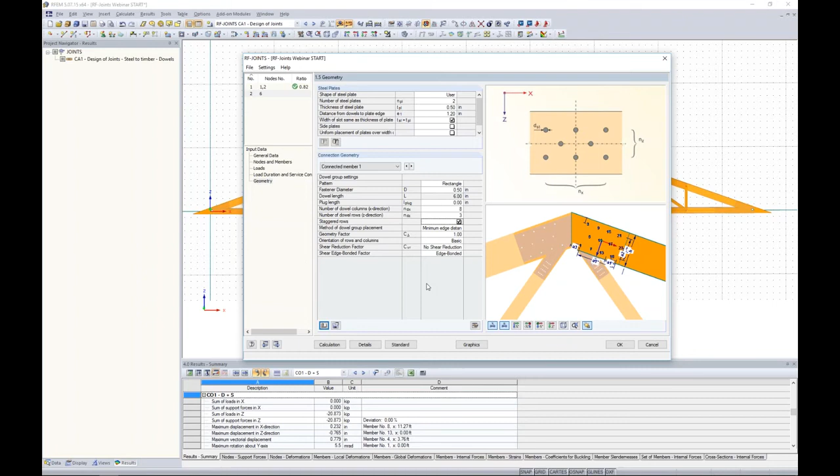Now dropping down quickly to the connected member, you can see this is a pretty slim member here. So we want to define our settings accordingly to 0.5 for the fastener diameter. The number of dowel columns, for this one we will set this equal to 6, but I only want 1 row. Now the staggered effect you can see really doesn't matter whether I have this checked on or off. The minimum edge distance, we'll leave this the same.

You will see that now we have the option for member eccentricity in the X and Z direction. So if I physically want to move this brace member to the left, to the right, up, down, I can change that here by just simply adding in that distance. Now keep this in mind because I'll show you in a minute how to export these eccentricities back into RFEM. For today, I'm not going to put any eccentricities in there, but just know that that's an option if you don't quite see the layout that you would like.

What's also impressive is that the program automatically knows that this is not a glulam member simply based on the material settings alone. So now we have things like the incising factor, repetitive factor, size factors for this simple post or brace member that are applicable. So again, you don't have to manually apply these factors, but the program knows they automatically have to be assigned according to the NDS code. Again, we'll just leave all of these as default according to our standards button down here.

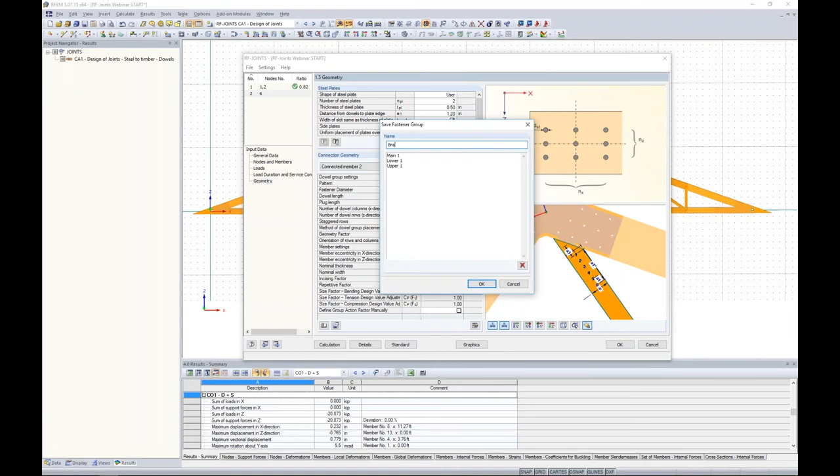We can save this again. We will call this one brace 1. Now I drop down to my connected member number 3. I open up my library. I select brace 1. I click OK. Everything is automatically updated. So a very efficient way to pull up the already defined settings from the other brace.

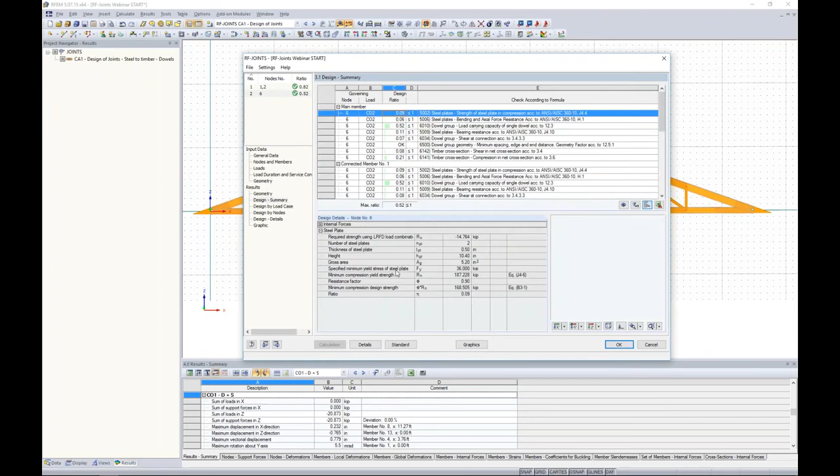Now we're ready to run a calculation. So again, it solves rather quickly. You can see that this brace connection went over a little bit better than the last one. We have a controlling code check of 0.52 here. So everything looks great in terms of that. Again, we can view everything graphically for this connection here. Under the drop-down box, you'll notice that we have our first load case for our joint and our second load case. So right now we're in the second load case viewing this connection. Again, I can rotate my settings here to see these steel plates embedded within my glulam members.

So that really is connection design, but the last thing I want to show you is the interaction of RF-JOINTS with RFEM. So what do I mean by that? Well, under the details, we have the option to, first of all, generate the member eccentricity. So remember with the braces, I told you you could move that in the X or global X or Z direction. Well, with this option checked here, the program can automatically export little rigid links to move that brace back in RFEM, whichever way you specified in RF-JOINTS.

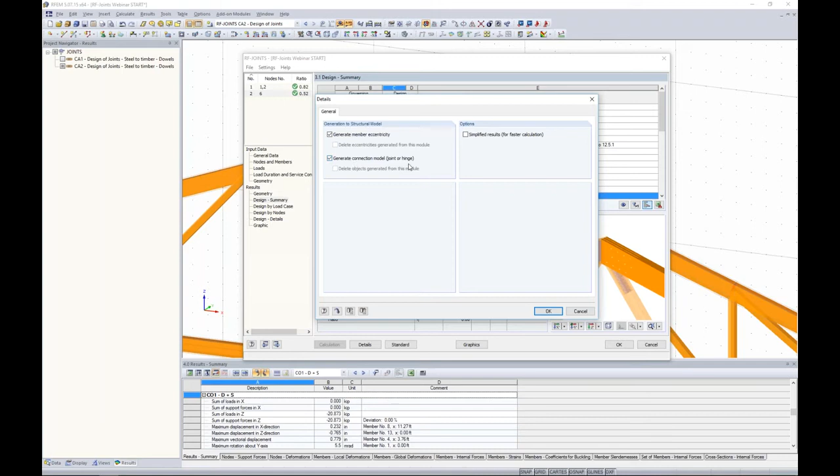Now, I'm not utilizing that today, but what I am going to utilize is the generate connection model of a joint or a hinge. Now, before I do this, there are some prerequisites, and if you don't do this, you will get some simple warnings within the program. So if you do forget this part, the program will remind you.

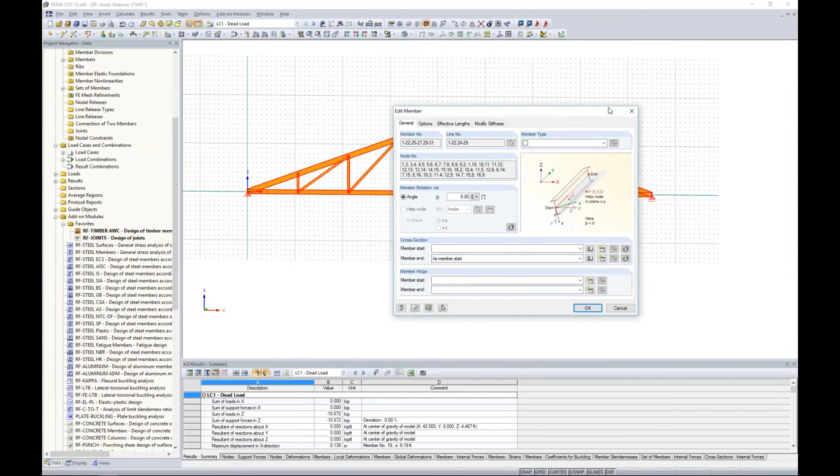But the first thing that I want to do is I'm going to change this back to RFEM just for the simplicity. So I'm no longer in the add-on module, and I'm going to select all of my members here. I'm going to right click, select member and edit. So remember that right now we have some truss members and we have some beam members. Well, in order to export out my RF-JOINTS settings, all of my members need to be beams. That's just for the simplicity of the program. So that's fine. I'm going to set all of these to beams.

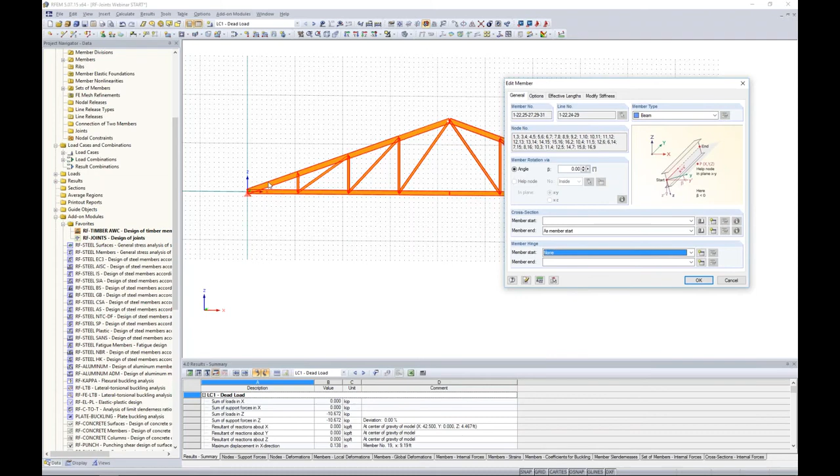Now the other thing I'm going to do is get rid of all of my member hinges. Remember I applied member hinges up at the top here and up at the sides. So now every single member hinge will be set to none, and I click OK. So we did do connection design at the top here and at the left and the right of the truss, but I did not do connection design, simply for the sake of time, for these other members.

So in order to get accurate internal forces, what I do need to do is hold down my control key and select all of these members that I did not do connection design. I'm going to right click, edit my member again, and for this one I will add back in that moment release at the member ends. This is simply because I don't want moment transfer to my upper and lower chords.

Now for this one I did do a connection design at the top, but at the bottom I didn't. So at the member start I'm going to add back in that moment release, and at the member end for this member I will add back in that moment release. So now the model is set up accordingly, so we can jump back into RF-JOINTS. And under the Details tab, we will generate the member eccentricity with the Generate Connection model.

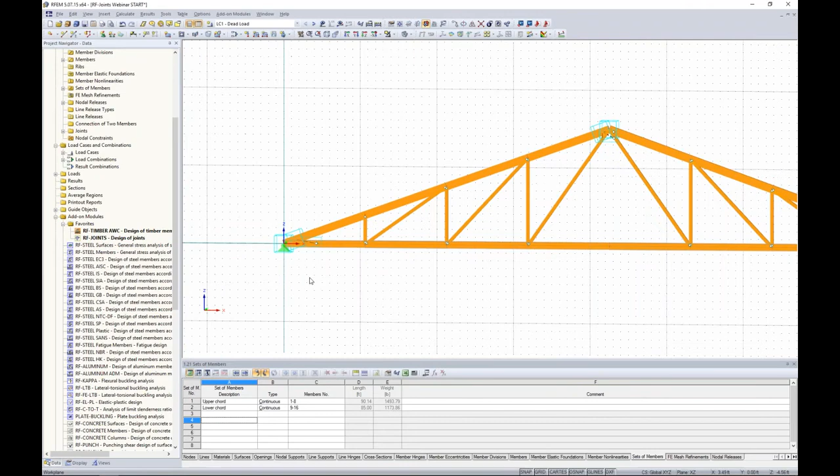So I'm going to click OK, click OK, and now we get these funny little looking boxes where my connection designs are. So what is exactly going on here? Well, I'm going to turn this to wireframe so we can see this a little bit better. Now, the first thing the program's doing, if I double click on this box here, is it's done a complete nodal release. So it has released member 9, my lower member, from this support. And instead, it's connecting member 9 with a little fictitious rigid link to my upper chord.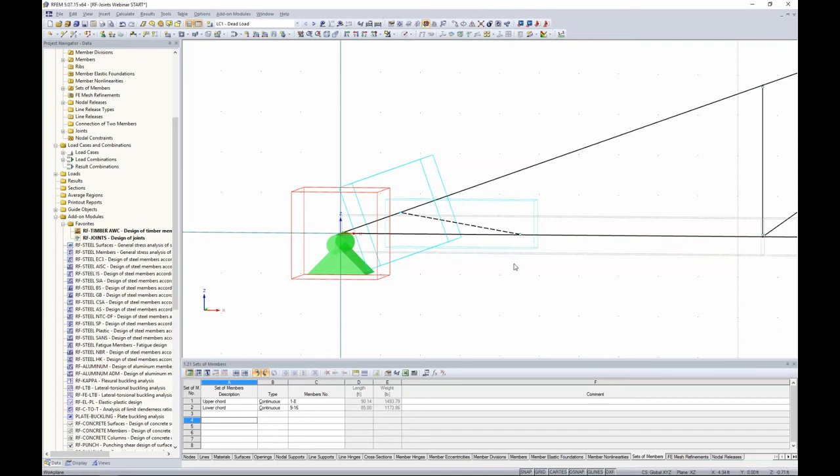Now, the significance of the location of this fictitious rigid link is that this is the center of gravity of my steel plate for my upper chord and the center of gravity for the steel plate at my lower chord. So we're actually taking into account the geometry of that connection. Now, double clicking on one of these other blue boxes, you'll see Edit Joint. So this is what's being exported from RF-JOINTS. Here's a nice picture because it can be a little bit overwhelming.

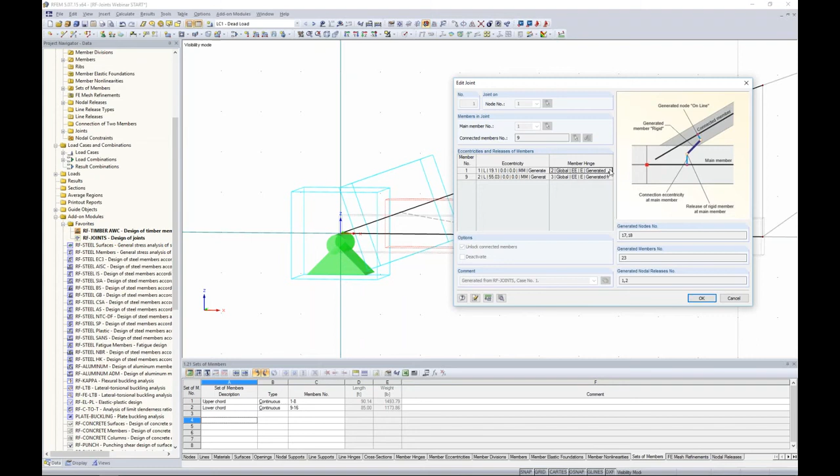We show you the generated member, the rigid member here, and more importantly, the member end releases for this rigid member is a partial fixity. And if I take a look at the details here, the partial fixity is based on the stiffnesses exported from RF-JOINTS. So the different degrees of freedom are actually calculated based on my true connection in RF-JOINTS. So now instead of representing my connection by a single node here with my nodal release, now I really have the true connection in the model based on the accurate stiffnesses.

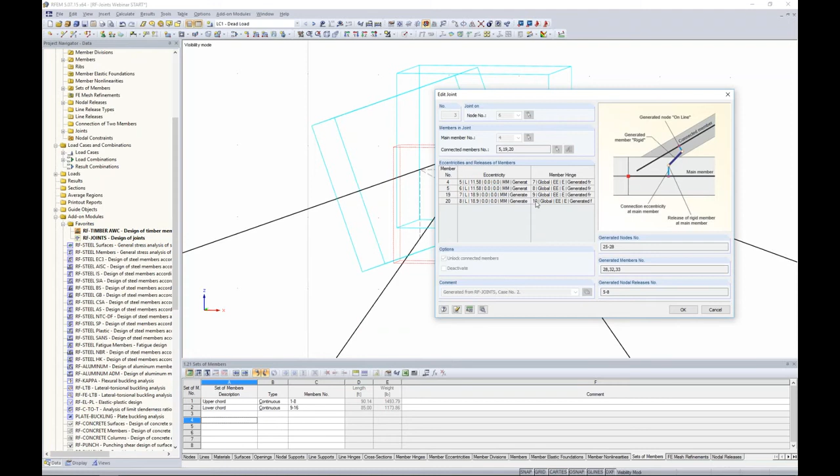So pretty powerful feature, and I can take a look up here at the top. I now have all of these fictitious rigid links here connected at the center of gravity for all 4 of my steel plates. I can double click and take a look at this joint. Again, I have 4 different member end partial fixities here based on the stiffnesses from the connections brought in from RF-JOINTS. So now back in RFEM, if I were to run a simple load combination here, my LRFD load combination.

Oh, one more thing I forgot to mention: sets of members. The set of members was automatically created, which I mentioned for our truss generator. But now that we have this nodal release up here at the top, the set of members for my upper chord is irrelevant. The program just gave me an error about that.

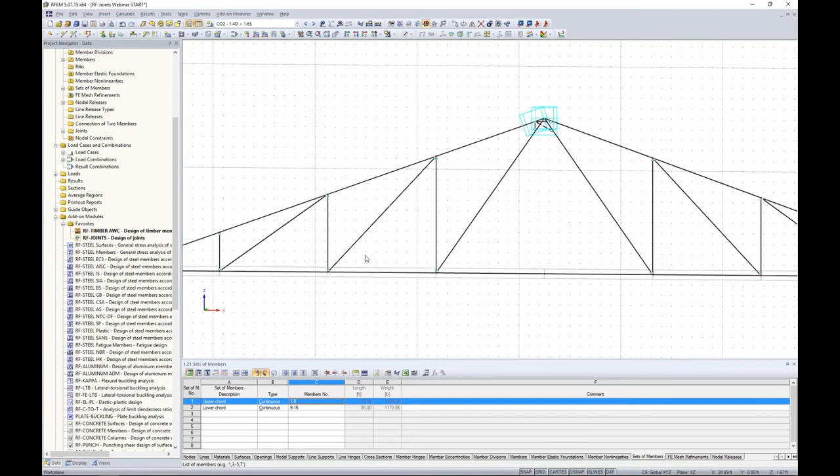So what I want to do is redefine my set of members as two separate sets now. I can right click, create sets of members, one continuous member, but I need to create a second set of members here by holding down my control key. So now these can still be designed as one continuous member, but because we have this joint release up here at the top from RF Joints, we can't create one set of members for this entire top chord.

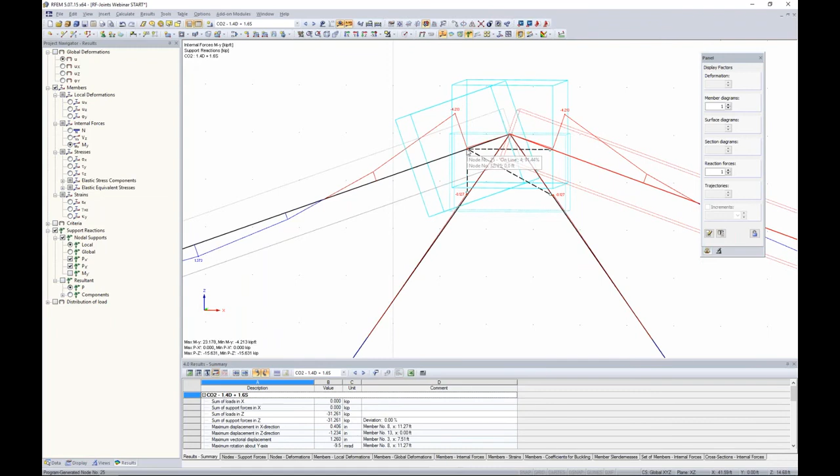So running the analysis again quickly in RFEM, we can take a look at our internal forces. Now you'll notice the program will actually use these internal forces at the center of gravity at that connection. That's essentially what we want to represent with these joints: the actual stiffness that's going on as well as the geometry. Same thing for down here. You can see we have a little moment spike, as well as if we're looking at shear, because we have a cantilever now from the support to the connection.

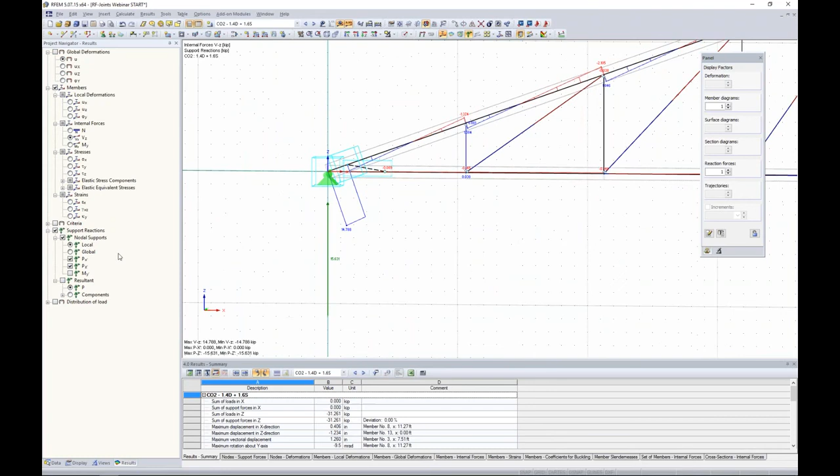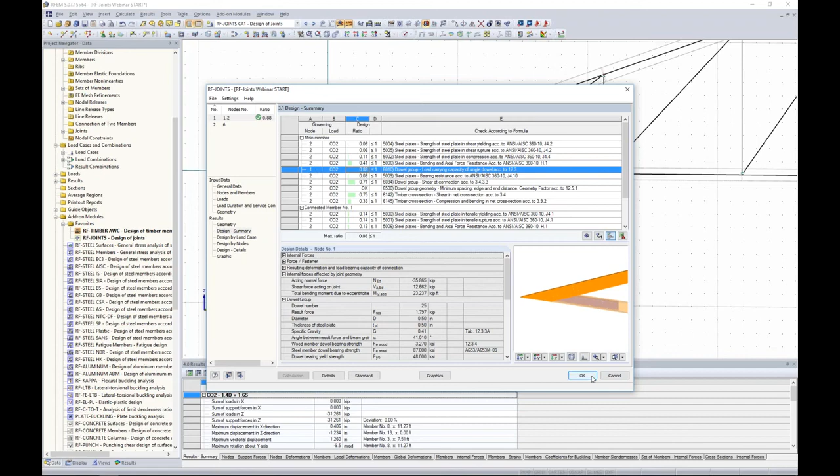Ideally, we want to go back into RF Joints here. We can go to add-on modules, current module, and rerun our calculation for both connections, because our internal forces slightly changed now that we're taking into account the true stiffness. It looks like our code check is at 0.88, a little higher, but we're still okay in terms of our design. We'd want to run the design for node number 6 as well. So again, a pretty powerful feature if you want to truly take into account the stiffness and geometry of that connection back in your model.

Now, the last thing I want to show you before wrapping up the webinar is tapered and glulam members. I'm only spending a couple minutes on this because it really doesn't vary too much from the design we've already done, so not much time needs to be spent on it. But I do get asked quite often: how does your program handle tapered and curved glulam members?

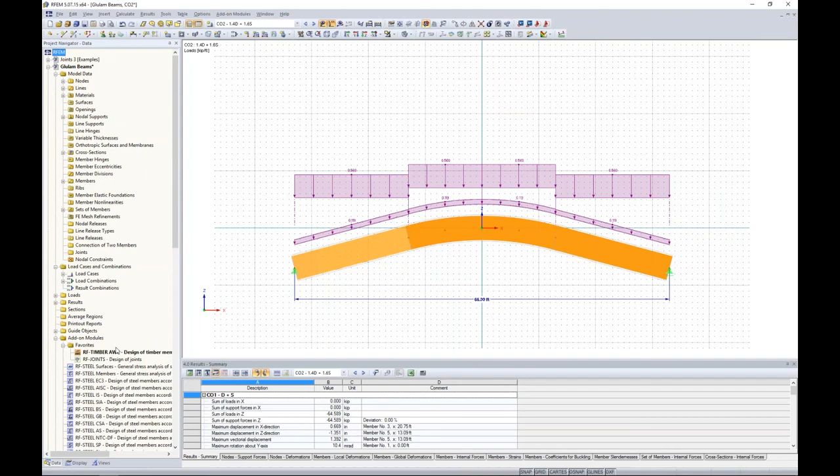Now, jumping into RF-TIMBER AWC, I have already created two separate cases. The first is tapered glulam, so I'm only doing design of my member number 1 for my first case. Then under the second case, curved glulam, I'm doing design of my set number 1. You'll also notice I'm running LRFD for my curved member here, but my tapered member I'm running ASD. So you can even run different design methods within the program if you'd like to.

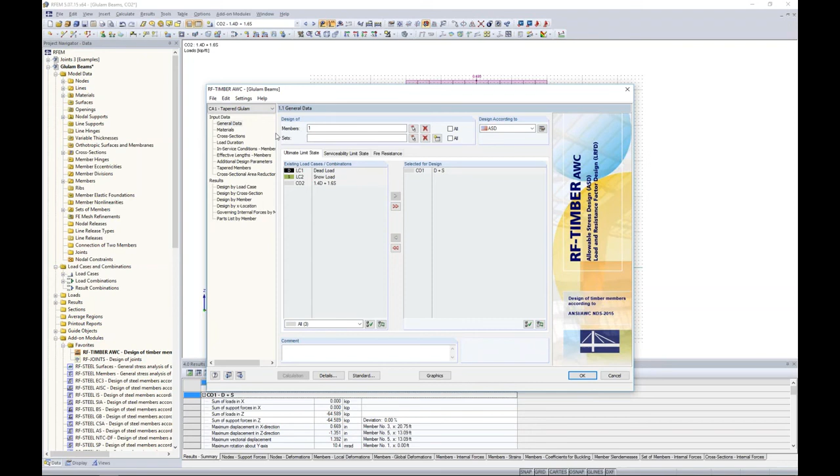So there are two distinctions with the curved and tapered glulams compared to our straight, typical members that we did before. The first is under load duration — you'll notice now we have a loading condition for radial stress design. If we use the drop-down box here, we have two options: other types of loading, or wind or earthquake loading. This simply comes from table 5.28 in the code, and for tapered members it's important because it's needed for stress interaction factors from 5.3.9. So you can specify that type of loading here.

Now, the other thing is that a new table was automatically created because the program recognized this is a tapered member, called 1.10 tapered members. Simply the cross-section at the start, cross-section at the end, the length is automatically brought in, as well as the angle of the taper. Now there is one thing we do need to specify, and that's just the grain parallel to edge.

Now there are cases such as if a beam is in uplift, for example, or maybe a cantilever, or anything of the sort where you can use your engineering judgment to change this to something otherwise. Now as far as the design, we can jump down to design by member. Really not much is different, other than our code references. If we take a look at some of the code references here, you'll see equations from chapter 5. This is the glulam chapter in reference to tapered and curved glulams as well, and the program just automatically does those checks for us.

Now the other thing to jump to is the curved glulam. Again, two differences. Load duration, again we have the radial stress design. This is a little bit more significant for curved members for the radial tension stress capacity.

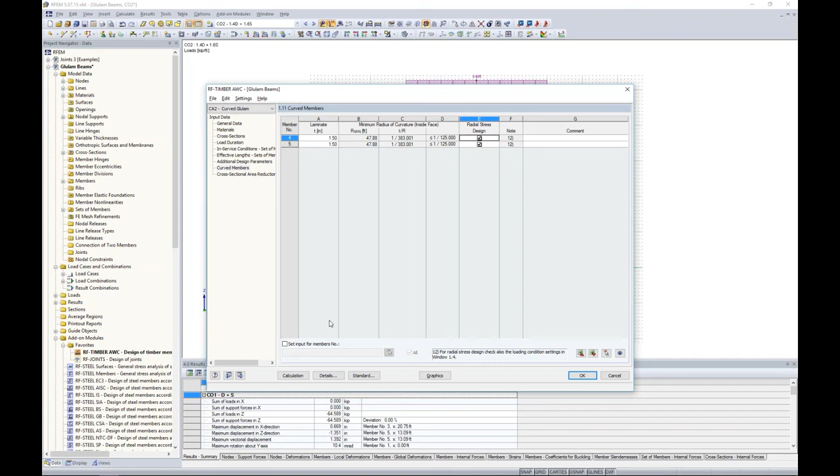Again, running the calculation here quickly, nothing is different in terms of taking a look at our results tables other than our code references to Chapter 5 for the glulam members.

So with that said, you can see I just quickly flew through that, but the reason why is really not much changes, and the program pretty much automatically detects these types of members and will point you in the right direction for your user input.